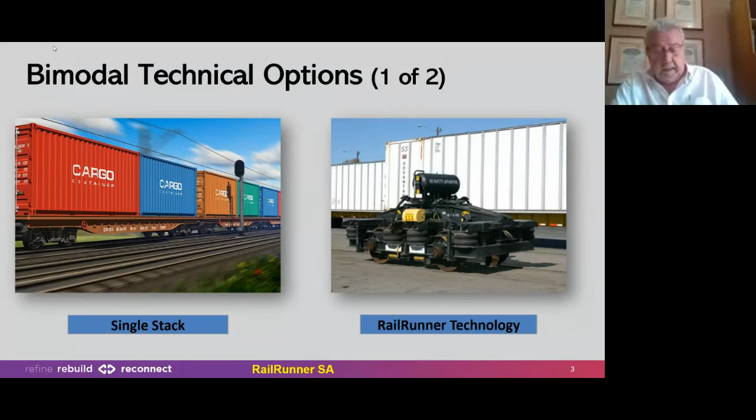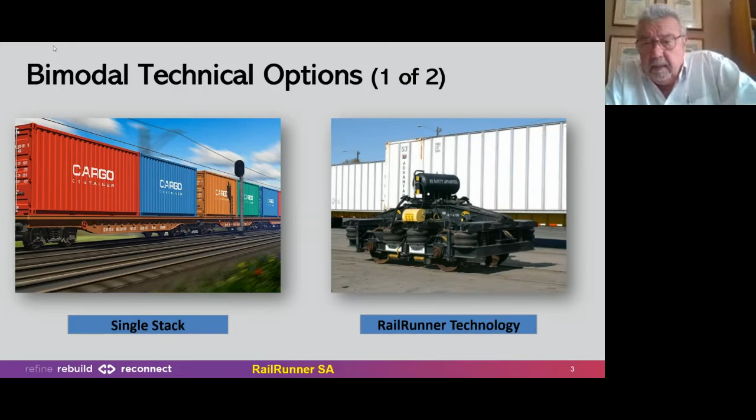So let's go through a few of the options and understand why RailRunner is best suited for the South African and SADC region. On the left-hand side, we have a flat rail car with single stack containers on it, running under a catenary wire, typical for Cape Gauge in South Africa, standard gauge in the UK, but not typical for the US. On the right-hand side, we have RailRunner technology, which is also a single stack, consisting of trailers and rail bogies, which we'll talk more about a bit later.

Then when we get to bimodal technology, there are two of those. On the left, we have what is called RoadRailer. With RoadRailer, the strength is in the box, so the box shape of the car has the strength. You can see that rail chassis is very basic: there are 2 axles, 4 wheels, and some brakes, and that's it.

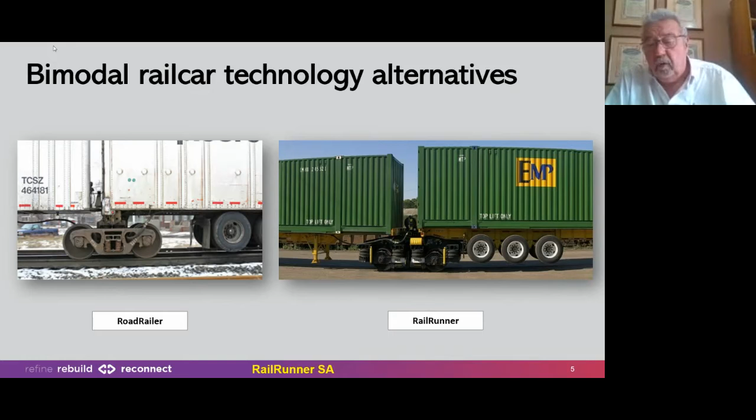So here's a little video - what is RailRunner? There's no sound, so I will continue to talk. If any of you want to access this video later on, you'll find the YouTube address on the top right-hand corner of the slide.

Here we have the RailRunner unit reversing onto a bogie, and as quickly as a truck driver can reverse, one can push a trailer onto a bogie. We have a special bogie, called an intermediate bogie, and a road trailer would sit on either side of it with the wheels hanging underneath.

We take the wheels with us, we just don't take the horse. Under the catenary wire, on a level graded surface, you can reverse a trailer onto an intermediate unit. Here comes the transition unit - that is the unit that transitions the train to the locomotive.

So our design in South Africa is to have 40 or 50 units, all moved by one locomotive.

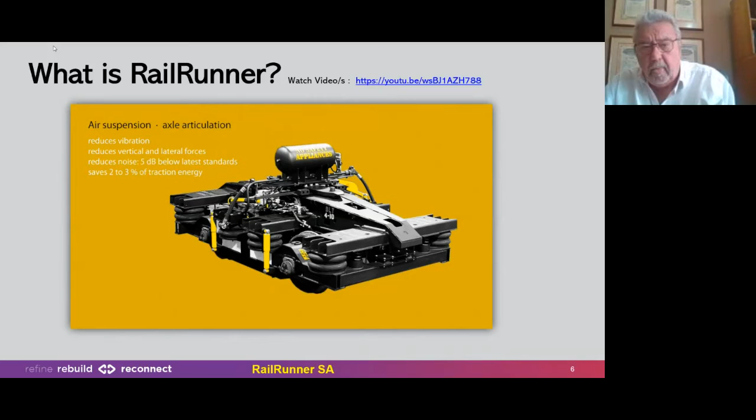Simple, fast implementation, compatible with regular freight trains, train forming under catenaries is possible, and flexible bogie change. So if we find that we have a rail bridge washed away or other problems on the rail, or a derailed train in front of us, we can actually break this train at a level crossing, get some horses there, and we can move around that obstruction and reconstitute the train on the other side.

So no freight is left behind. We've got some trailer designs in the top left-hand corner - that's a half-height container, because we can insert a bladder into it, fill it with fuel, take it to a mine site, empty the fuel, store the bladder, and load mining product into that half-height container, then take it back to the port.

Below that is a side tipper for manganese, chrome, coal - any domestic mineral can be transported in that. We wouldn't try and compete with the heavy haul lines of the iron ore line or the coal line. They are bespoke, special animals, and people come from all over the world to look at how Transnet hook and haul the coal and the iron ore.

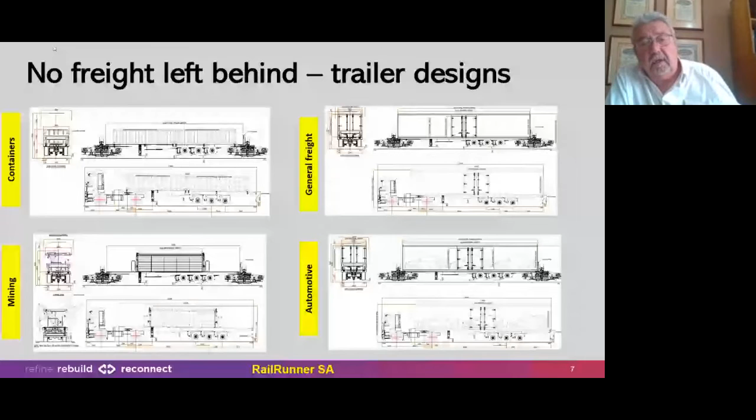So basically what's happening here is we would build the train and Transnet would hook and haul it like an iron ore or a coal train. So we're using the strengths of private enterprise to obtain the cargo, build the train, and at the same time use the strengths of Transnet, which is world-class at hook and haul.

Top right-hand side is a hard-sided trailer. You'll notice the doors on the side, so we have doors at the back and on the side, both sides. And because the strength of the trailer is in the floor, we can do that. That can transport dry goods. We can drop a generator underneath it, and we can do cold chain with it. So that is a very versatile, hard-sided trailer.

We do curtain-sided trailers, flat trailers. Anything that you can see on road can go onto RailRunner. And at the bottom there, we're showing you three vehicles safely ensconced in a RailRunner trailer.

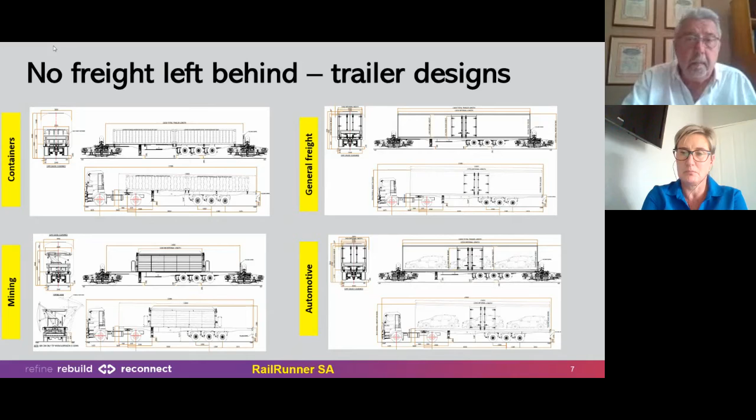The regulatory environment is driving change. I'm not sure if you are aware, but the DRC is implementing laws that allow only DRC-registered trucks and logistics companies to carry DRC products. Zambia is installing a network of toll booths, only for foreign-owned trucks, not for locally owned trucks. Botswana are requiring local drivers delivering goods in Botswana. And in South Africa, foreign truck drivers aren't welcome.

We've witnessed many vehicles being torched and unrest, prior to the Zuma unrest, just on the basis of local companies using foreign truck drivers. And these actions are continually increasing the cost of logistics in SADC, and thereby prices of consumer goods are increasing. And this isn't sustainable. The income of the consumers in the SADC area isn't increasing at the same rate as the costs. And this is where RailRunner comes into its own.

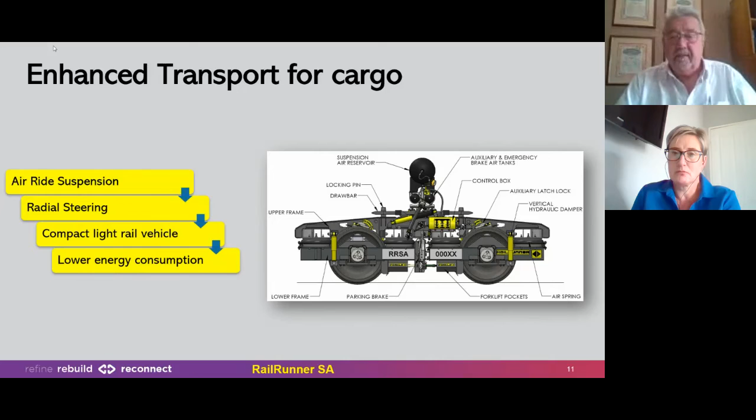It's a compact light rail vehicle, and when we say light rail, a conventional flat car that carries containers weighs about 20 tons. If we compare that to a RailRunner vehicle, we would weigh about half of that. So even in transferring an empty train from point A to point B, we use less tractive effort, less diesel, and are more environmentally friendly than conventional rail vehicles. And that is how we lower the energy consumption. So we now have a vehicle that can go on road and rail, is lighter than a conventional rail vehicle, and has a lighter footprint on the environment.

So we call it a revolution. We load at origin, we load and lock your precious cargo into a RailRunner controlled environment on a RailRunner trailer for secure transport on rail and road, and you unlock and unload at the destination. So very much the way we've used seagoing ISO containers, one can use a RailRunner trailer in the same way for local transport.

Locked, sealed, and safe from theft, damage, contamination from germs or viruses in the same container or trailer from origin to destination. Our promise: security, quality, safety, and hands-free. RailRunner pays its way. Efficient, low-cost terminal anywhere. And now we're getting into the terminal anywhere.

Low barriers to entry, promote intra-SADC trade, lift in GDP of these countries, and maximize existing SADC rail infrastructure to create trade corridors. I spoke earlier about moving from Durban to Francistown on rail, back onto road in Francistown, across into Zambia, and then back onto rail. If one does that and gets that trade corridor flowing, it will attract finance.

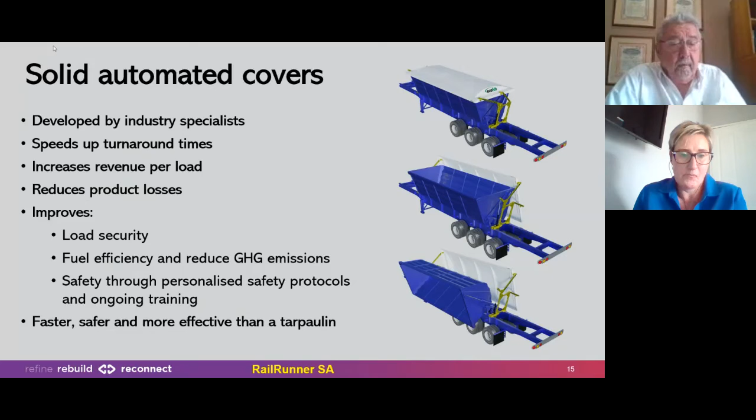Again, we have a greenhouse gas emissions reduction, and then safety through personalized safety protocols and ongoing training. 2:00 in the morning when the trailers come through a rainstorm and it's all wet, nobody has to climb upstairs to undo a tarpaulin. It is all manageable via the hydraulic system. So faster, safer, and more effective than a tarpaulin.

If we look at the expensive terminal, that would cost about 100 million to 200 million rand, whereas the terminal anywhere would cost around 10 million rand. So you can roll out your terminals a lot quicker, and you can get more terminals into place. So it's a low terminal cost, no heavy cranes, minimum ground preparation, and the terminal can be operated under the wire or under the catenary, under the electrical wire.

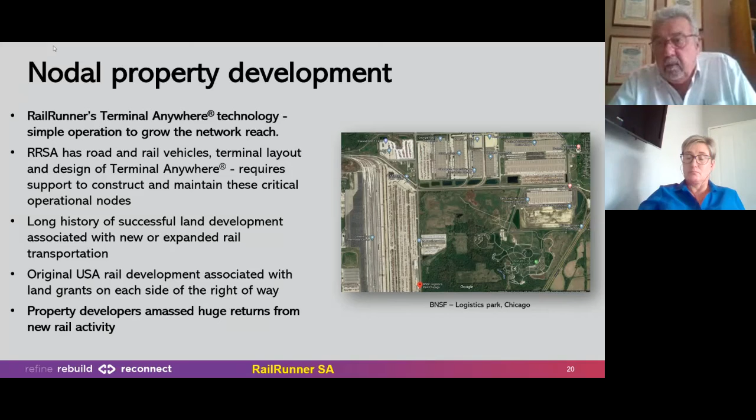The original USA rail development was associated with land grants, and each side of the railway line was given a right-of-way, and property developers amassed huge returns from that new rail activity. I think they got 10 miles on either side of the rail, and that was the payment for building the rail from the East Coast to the West Coast.

I'm almost finished. I think I've got one or two more slides to go. And so we can move freight from road to rail. We've discussed that. Access to and from railheads, socially responsible. If we get this right, the truck driver will not be on the road between Cape Town and Johannesburg at night. He'll be at home, where he can help with the upbringing of his children.

Transport any product currently on road safely and efficiently. We've mentioned that. We've gone through the different trailers. Real-time cargo tracking enhances cargo security and insurance savings. Secure transport, once again an insurance saving.

Smooth ride, air suspension. A small intra-vehicle distance, so it's aerodynamic. It's so close that people cannot get in and open the doors. So it assists with security, reduced noise pollution, lowers cost of logistics, and terminal and nodal development is achieved.

Now, I spoke earlier about a half-height container with a bladder in it. This is a short video where we can see the fuel being transported in the bladder. And bladders often, I'll wait until the music's finished and we can talk further.

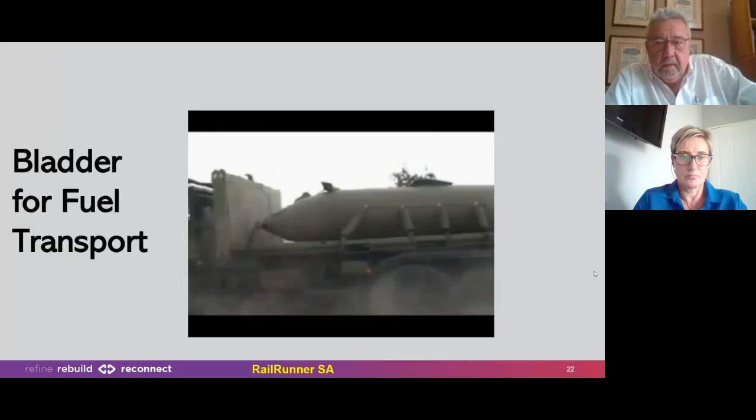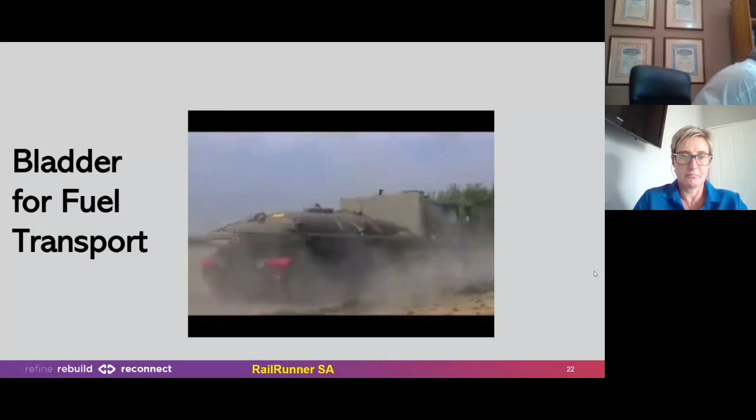But that braking was to show that the bladder wouldn't burst under braking. That's when the most stress is on the bladder. And I think I've done quite well. I finished in 31 minutes.

So I will stop sharing, and Pearl, we can go to questions and answers. Tanya. Sorry, you swapped people and now I was on mute. I'll swap people, that's fine. We're multitasking here today, and we're bimodal. We start with one person and we end with another. No, exactly. There we go. We're practicing it. So there are some questions here for you.

What are the challenges of the road transport market in Africa? Is there a regulation on the driving of road freight fleets in Africa? If yes, what is the driving time of a trailer driver per day and per week? Just considering the countries you mentioned, DRC, Zambia. The roads are in poor condition, and that's why it is better to take the load as close to its destination point on rail. The rail's also not high-speed rail. We can't run the Gautrain on it. But the drivers at the moment are driving from South Africa up there and getting there.